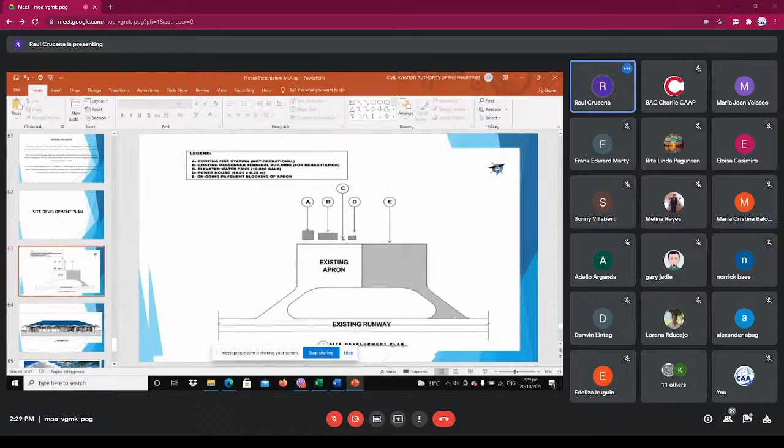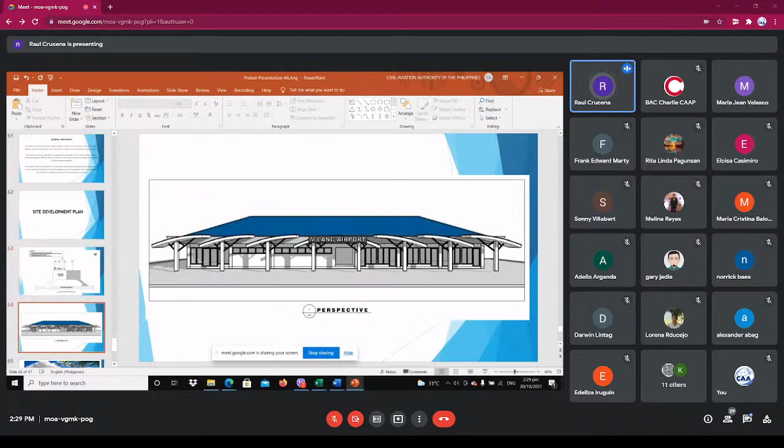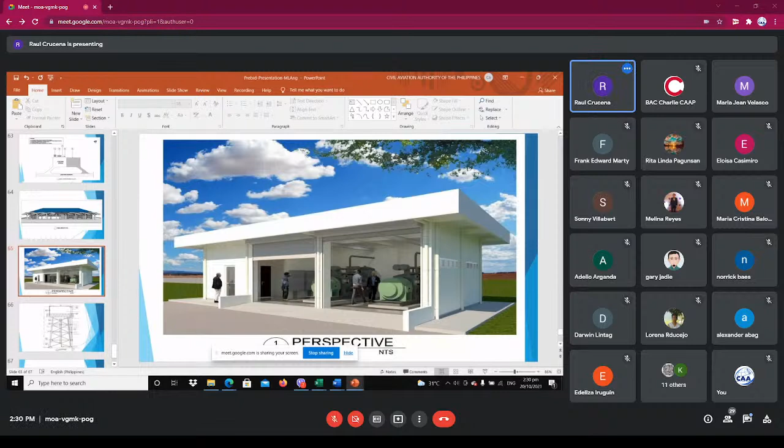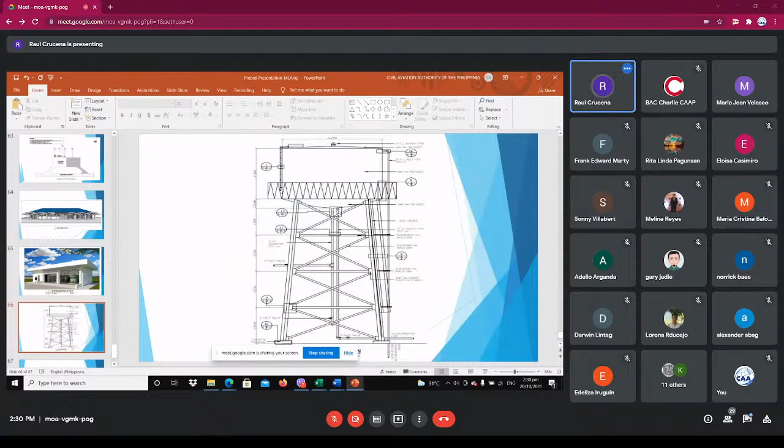For the site development plan, this is the site development plan for the apron. The perspective of the terminal building, passenger terminal building at M'Lang Airport. And the perspective of the powerhouse, construction of powerhouse. This is the elevation plan for the construction of the elevated water tank. That's all, Mr. Chair.

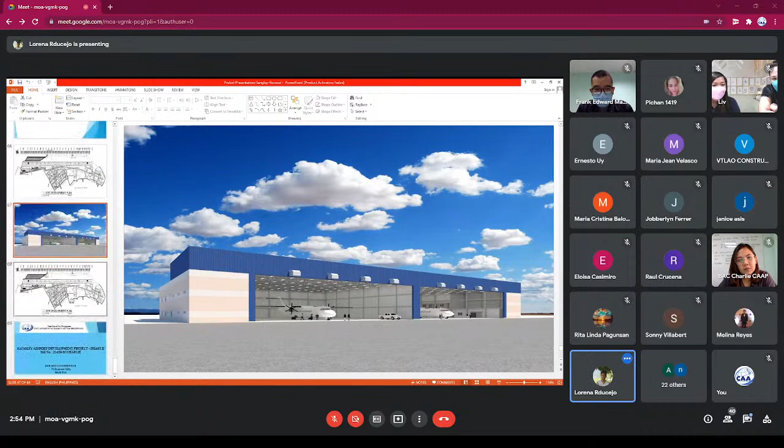So this is the site development plan of the project. This is the area for the reclamation works, and the area for the proposed 2 units hangar. This is the perspective of the 2-unit hangar. Reclamation area. That's all, Mr. Chair. Thank you.

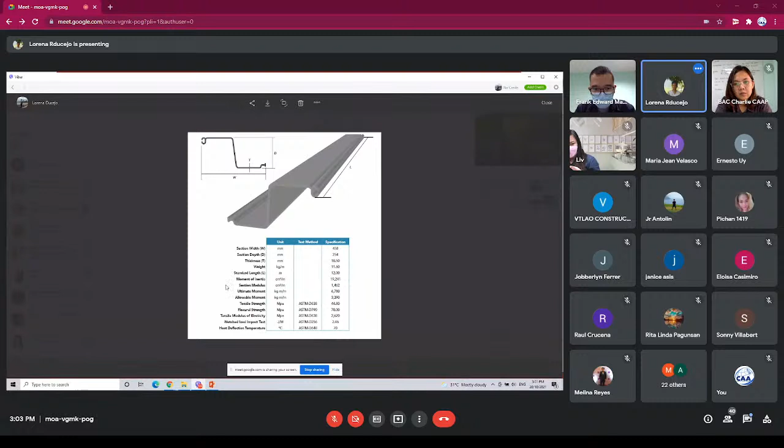Department Order 244 of DPWH for item 523, polyvinyl chloride sheet piles. Ma'am, these are included in the bid documents, no? No, attorney, we will include it in the bid bulletin. For the Vicente Lao query regarding the specification of sheet piles, we will just issue a bid bulletin to address it.

Do we have other queries or questions? As a reminder to our prospective bidders, the opening of bids is on November 5, 2 p.m. You still have 10 days to write to the BAC through our BAC secretariat with any queries or clarifications for us to respond to. Take note that we require submission of queries 10 days before the opening of bids so we can prepare. Otherwise, we will not entertain queries submitted after the prescribed period.

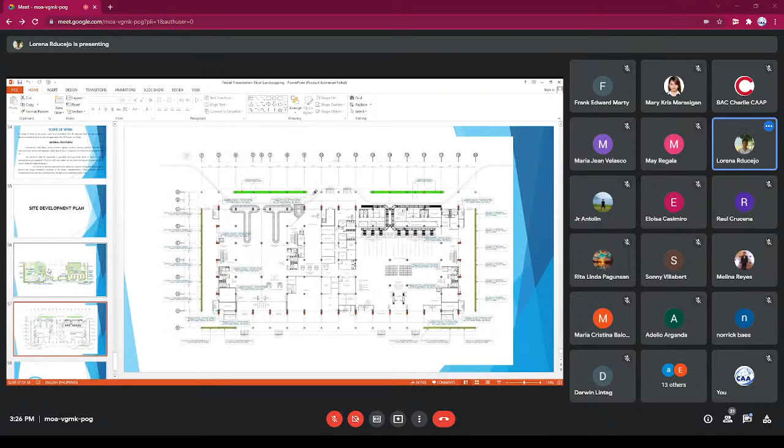Thank you, Engineer Eva. So at this point, the technical working group and the end user are now ready to accept or to answer queries from our prospective bidders.

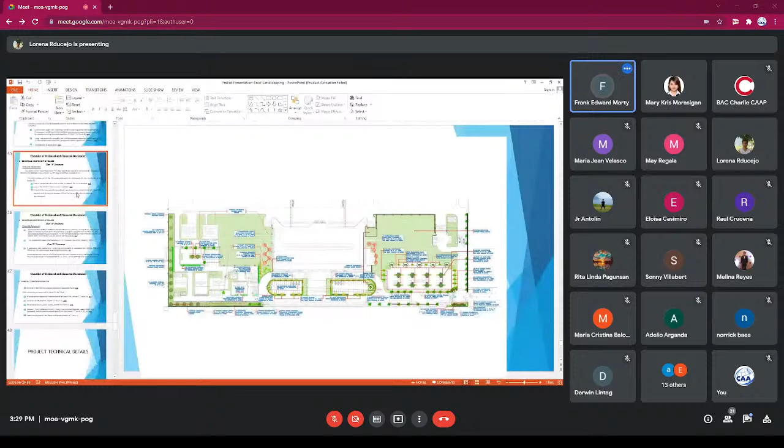Ay, so similar contract, yes. Verizontal is asking if yung sa similar contract natin na nakalagay is landscape or beautification work, so they're asking po if pwede daw ba yung sa road.

ADMS, please. Mr. Chair, if I may. Go ahead, Engineer Darwin. Yes, please, go ahead. Ang similar projects po natin nakalagay is beautification and landscaping.

So we cannot consider yung sinabi po. Verizontal, Ms. Marasigan, ano nga po yung pinapa-consider niyo, ma'am? Yung road rehabilitation po. Attorney, wait lang po, we are checking.

Attorney, may I? Yes, Engineer Raul. Query lang kay Verizontal, kung yung case na kinaklarify niya na roadworks, may major component na beautification and landscaping. Miss Mary Kris, meron bang component kayo doon na major component niya na beautification and landscaping doon sa roadworks?